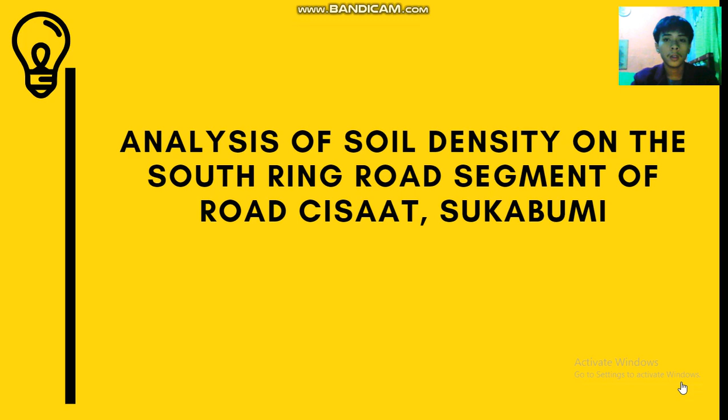I will present a scientific paper about the analysis of soil density on the South Ring Road segment of Cisaat Road, Sukabumi. Abstract. Soil pavement is placed on the surface of the land. The overall quality and durability of pavement construction cannot be separated from the nature of the subgrade.

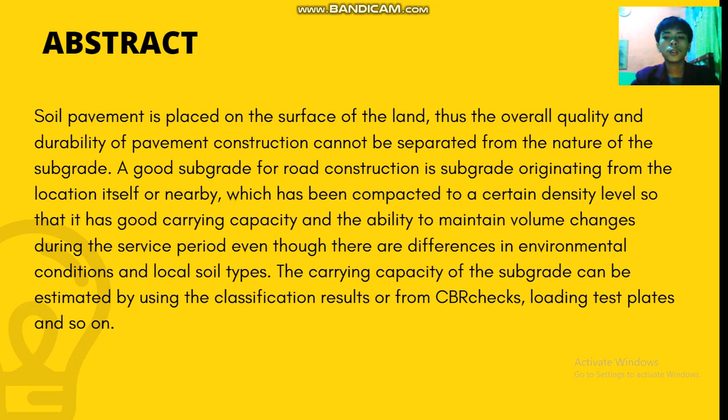A good subgrade for road construction is subgrade originating from the location itself or nearby, which has been compacted to a certain density level so that it has good carrying capacity and the ability to maintain volume change during the service period even though there are differences in environmental conditions and local soil types. The carrying capacity of the subgrade can be estimated by using the classification results or from CBR checks, plate loading tests, and so on.

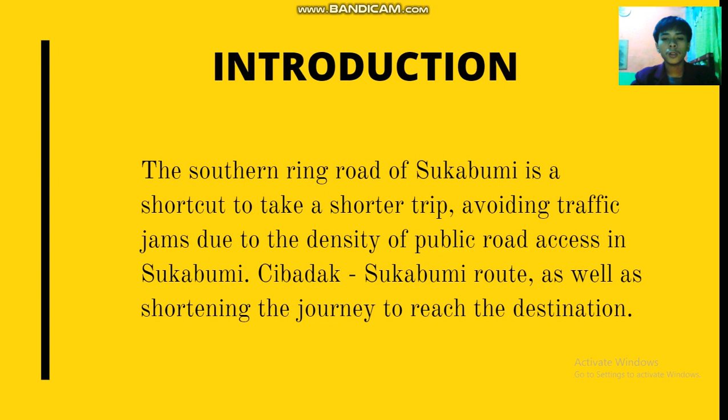Introduction. The southern ring road of Sukabumi is a shortcut to take a shorter trip, avoiding traffic jams due to the density of public road access in Sukabumi, on the Cibadak-Sukabumi route, as well as shortening the journey to reach the destination.

Methods. In the journal, the research was conducted at the construction site of roadworks located on the Southern Ring Road of Sukabumi to Cisaat. The study began by surveying the location to determine the contours of the land and the condition on the Southern Ring Road. This research was carried out in March 2021 by surveying the research location in preparation of this scientific paper.

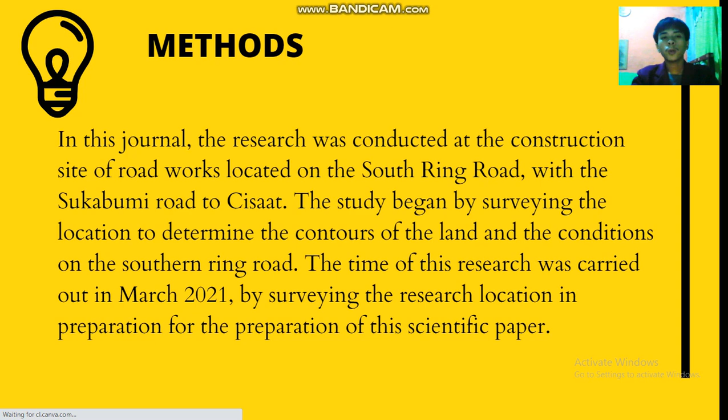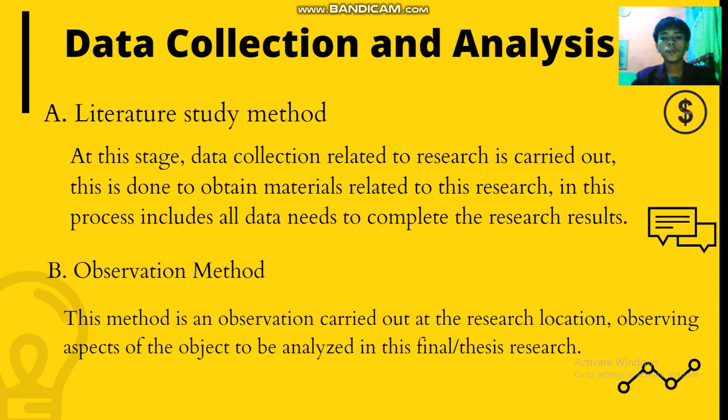Data collection and analysis. A. Literature study method. At this stage, data collection related to the research is carried out. This is done to obtain materials related to this research. This process includes all data needed to complete the research result. B. Observation method. This method is an observation carried out at the research location, observing aspects of the object to be analyzed in this final thesis research. C. Interview. That is looking for data by asking parties, to be more specific in the data collection process.

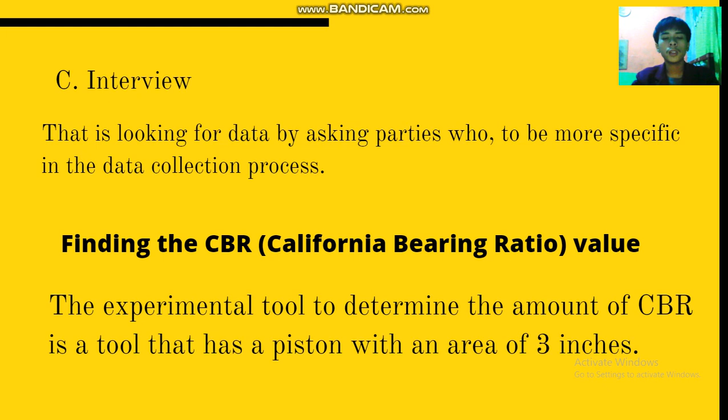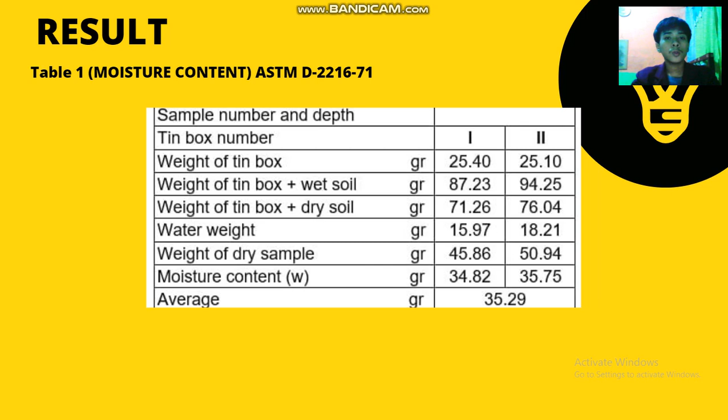Discussion. A. Soil characteristics. In the implementation, there are often obstacles regarding the surface contour of the land, caused by the unstable nature of the soil at the time of the study. There are also inhibiting factors in the implementation, determined by unfavorable weather such as rain.

B. Soil test. Soil data obtained from the research is secondary data obtained from the Department of Public Works. The data are presented in Table 1. The measurement results show the soil moisture content, which had a total average of 35.29 grams. Data on aggregate sieving can be explained through different tests of each sample, so that it will produce percent retained and percent passing.

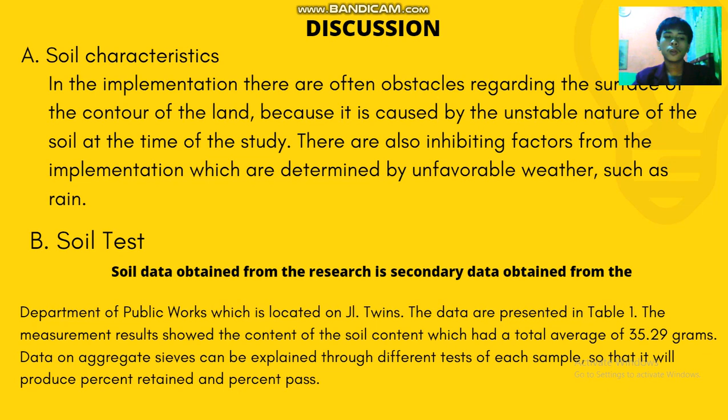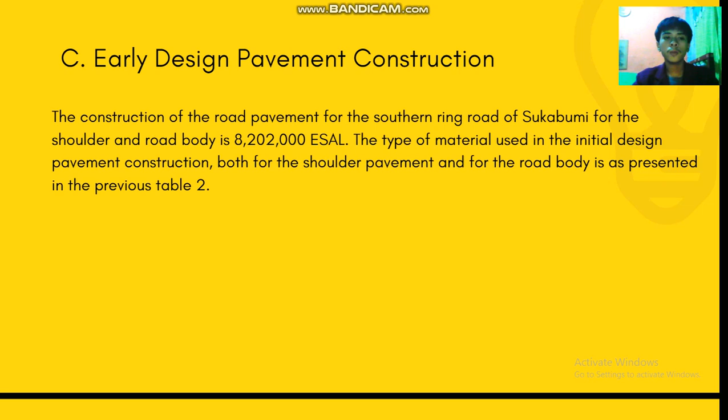C. Early design of pavement construction. The construction of the road pavement for the southern ring road of Sukabumi for the shoulder and road body is 8,202,000 ESAL. The type of material used in the initial design pavement construction, both for the shoulder pavement and for the road body, is presented in the previous Table 2.